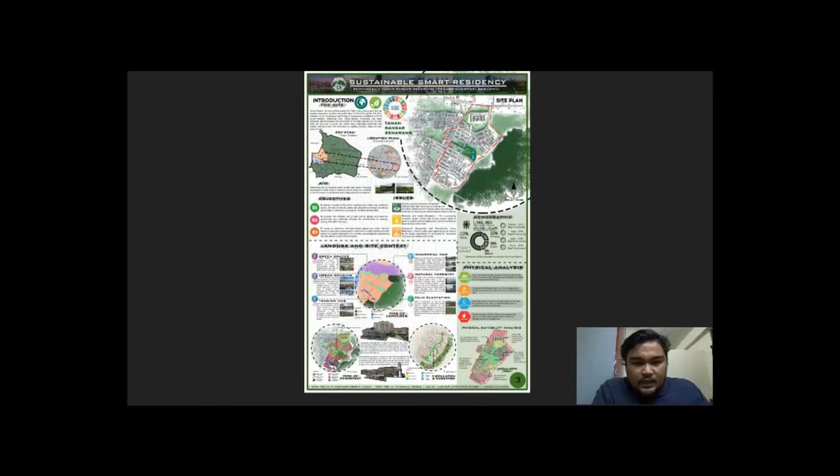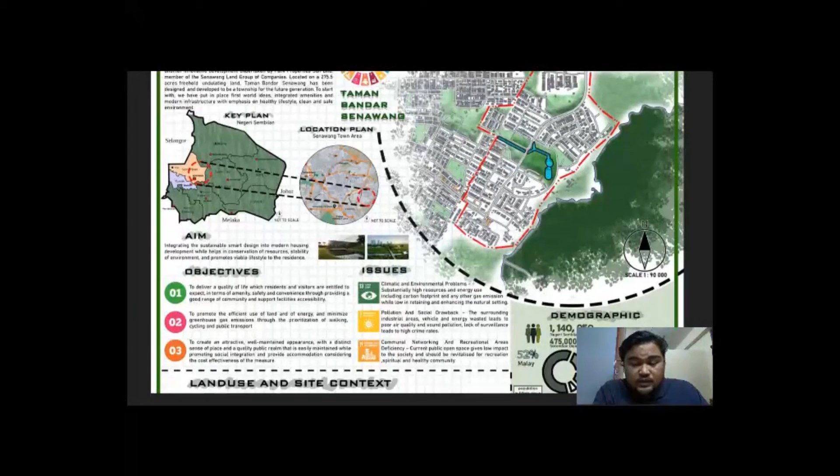I was under the supervision of Associate Professor LAr Dr. Mohd Ramzi Mohd Hussain and also Associate LAr Dr. Khalilah Zakariya, and my topic was Reinvigorate Taman Bandar Senawang through Eco-Smart Residency.

My site is located near Seremban, Negeri Sembilan, on 275.5 acres of freehold land that aims to be developed for future generations.

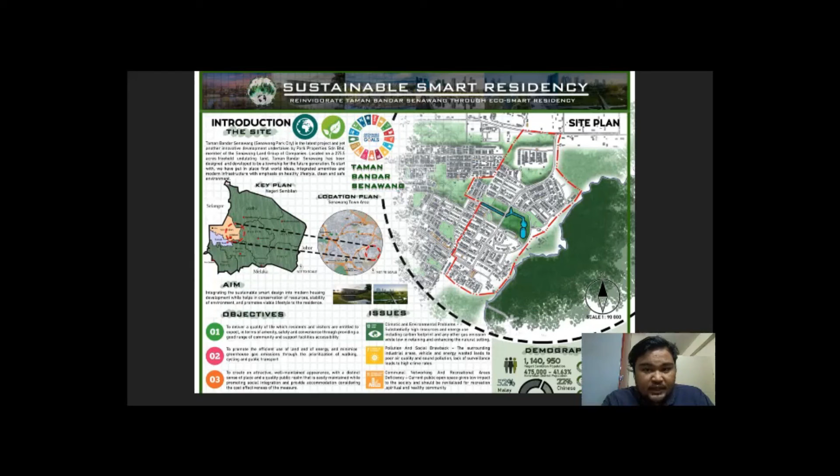The aim of the study is to integrate sustainable smart design into modern residential development. To support this aim, there are three objectives: first, to deliver a quality of life that residents and visitors are entitled to; second, to promote the efficient use of land and energy; and lastly, to create a residential area that is solid in communal networking, aesthetic aspect, and strong in social integration.

The main issues derived from the site are: first, climatic and environmental problems; pollution and social drawbacks; and also recreational and community area deficiencies.

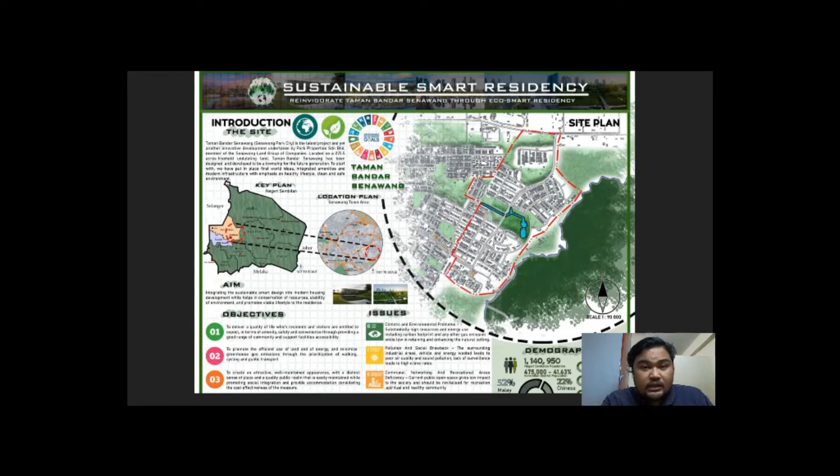After studying and analyzing the issues and potential of the site in the site inventory analysis, the synthesis is made. First, to overcome the safety issues, I introduced a sustainable smart security system that consists of smart fencing.

Second, for the climatic potential, the site can be used to gain solar power for electrical energy. Third, to address environmental issues through vegetation.

Proper and suitable vegetation was proposed, such as the Delonix Regia and Mimusops Elengi.

Fourth, to address almost all types of issues, I propose an Eco-Smart Park based on a community park that aims to fulfill all residential needs.

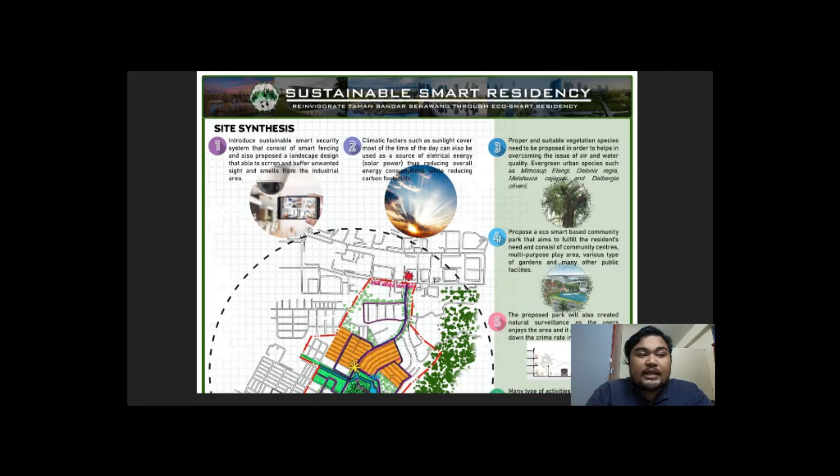The proposed park will also create natural surveillance, and many types of activities can also be done at the park.

Next, to overcome the circulation issues, I propose a good networking of pedestrian walkways and also bicycle lanes.

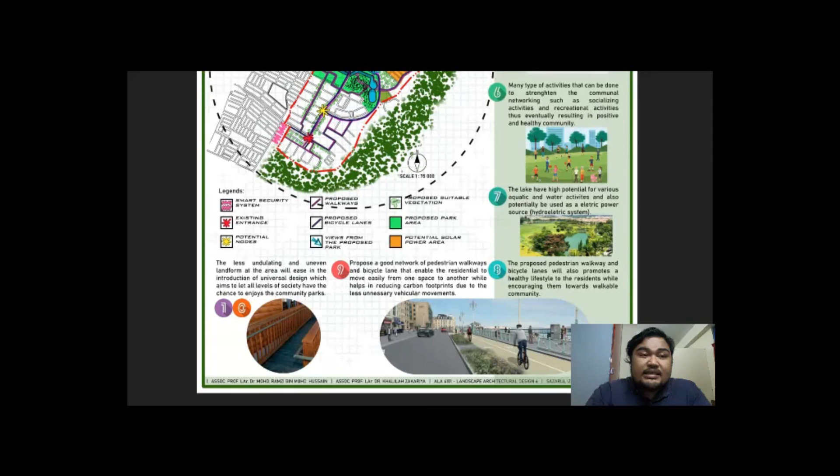Lastly, because of the topographical potential, the site has a less undulating landform, making it very easy to design for persons with disabilities (PWD) and also for elderly people.

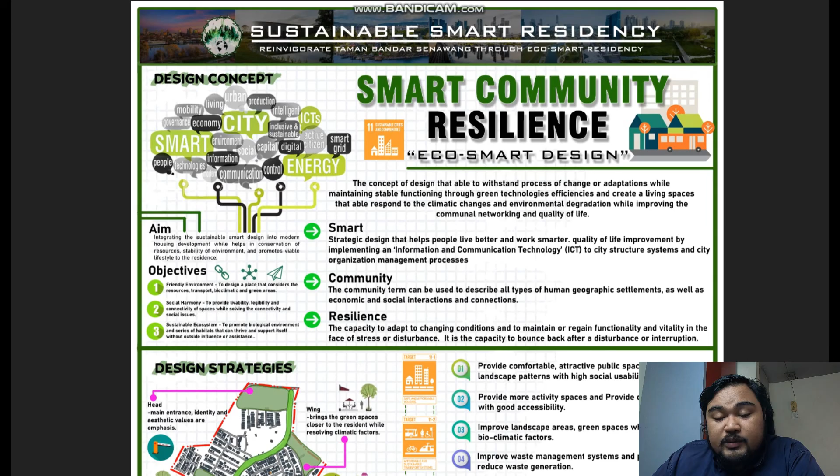My concept is smart community resilience, meaning a design that is able to withstand the process of change or adaptation while maintaining stable functioning through green technologies.

Next, for the design process, I'll proceed to the space programming, the bubble diagram. We aim to integrate the whole neighborhood area into a smart community park.

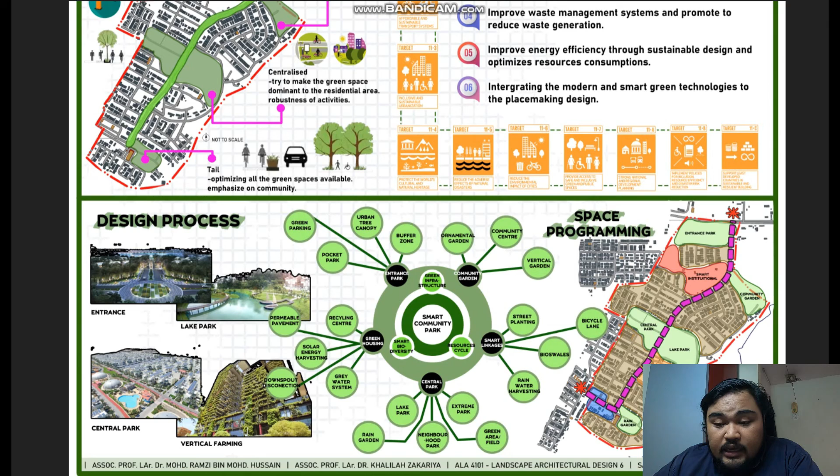the area has been the green area connected by the green corridor, or the spine, at the center of the residential area. Next, I would like to proceed to the functional diagram.

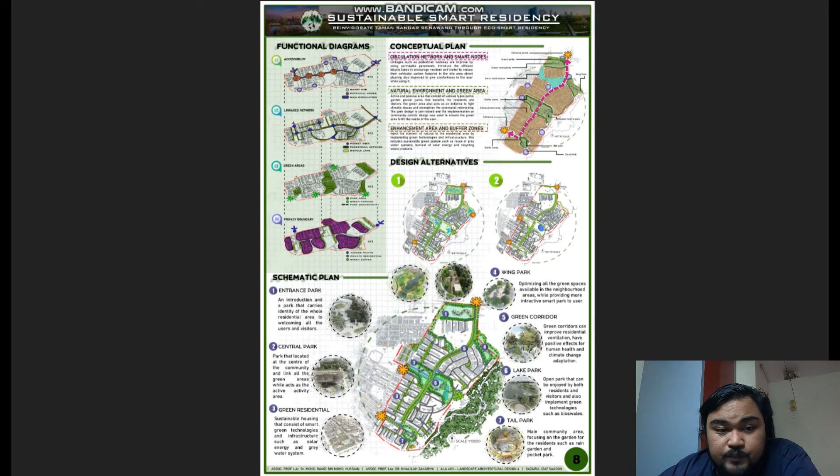For the functional diagram, I divided it into 4: the first one is accessibility, the second is linkages network, number 3 is green areas, and also privacy boundary.

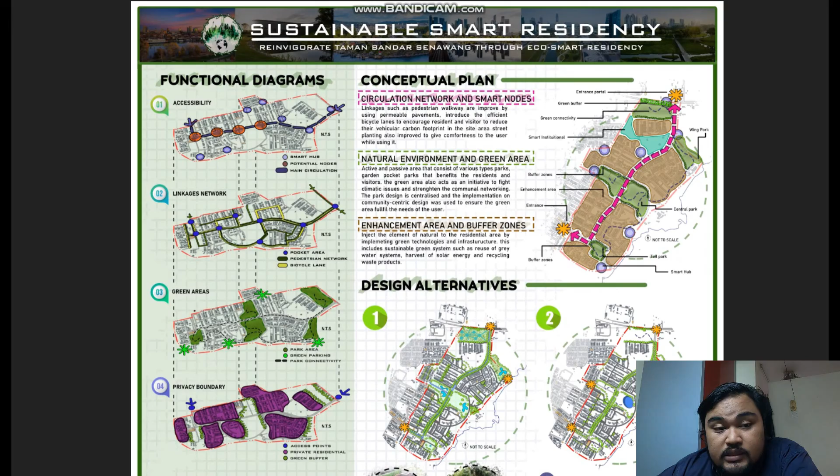The Taman Bandar is almost 70% private area, private residential, so I designed outside the privacy border.

For the schematic plan, we have 7 main areas: the entrance park, central park, green residential, wing park, green corridor, lake park, and tail park.

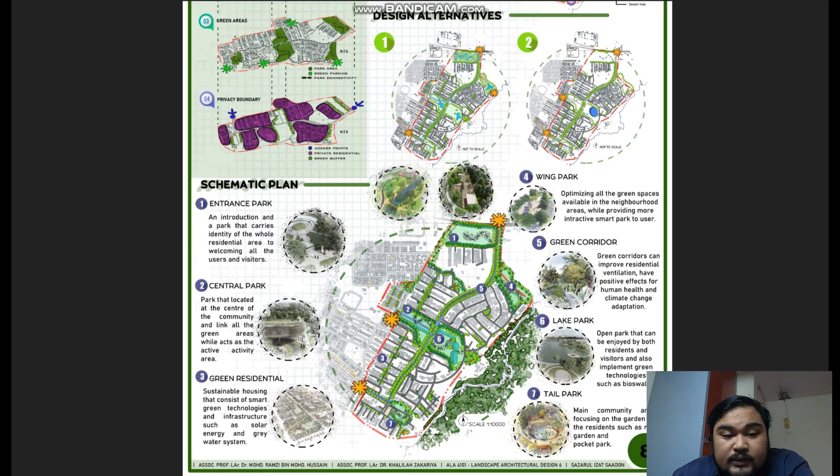The planting concept is divided into 3: the first is direction and accessibility control, the second is climatic order and approach, and lastly we have aesthetic values and sceneries.

The first one, direction and accessibility control: the planting was arranged to direct the user to the space that they want, and this also can avoid the feeling of being lost, and give the user or visitors a sense of welcoming.

Number 2, climatic order and approach: this is the selection of trees used that is dense with leaves, can filter out dust and any pollution from the air, and also contribute to better air quality and regulate surrounding temperature.

Lastly, we have aesthetic values and sceneries: the flowering plants and plants that have high visual impact were used to let the user enjoy while improving the overall sense and quality of the spaces.

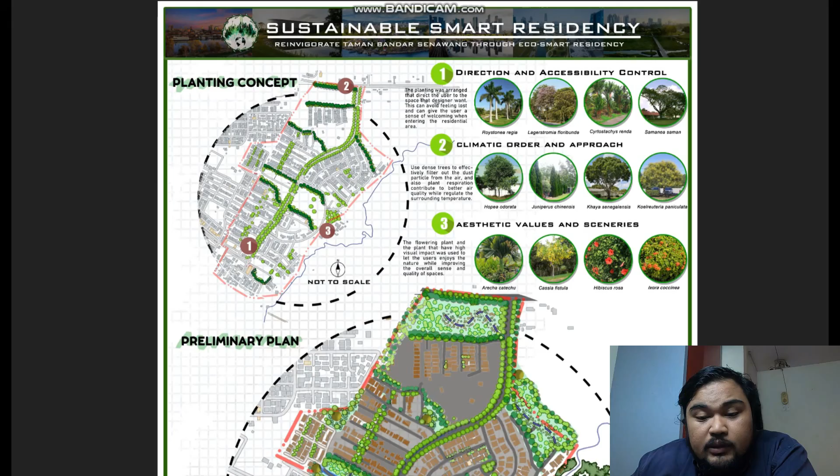For the preliminary plan, the scale used was 1 to 4000, focusing on the plant selection and plant arrangement, because the green corridor is very crucial as it connects all the green spaces to each other.

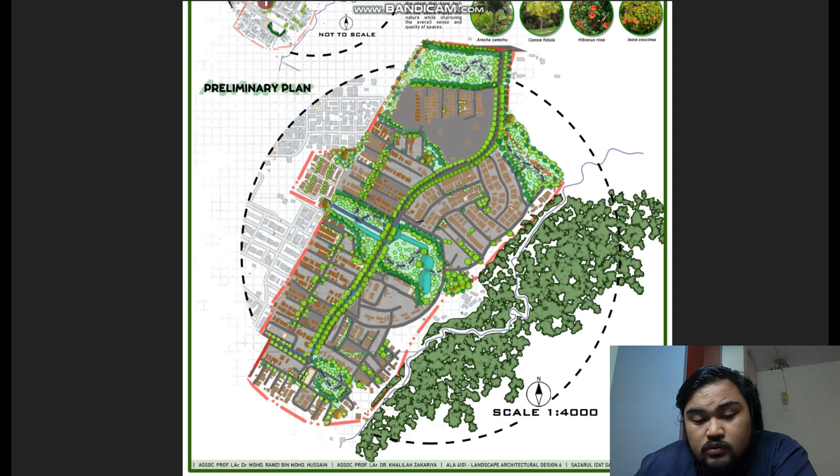So this is my master plan. My master plan focuses on designing the green area inside, such as the upper part of the park, so-called...

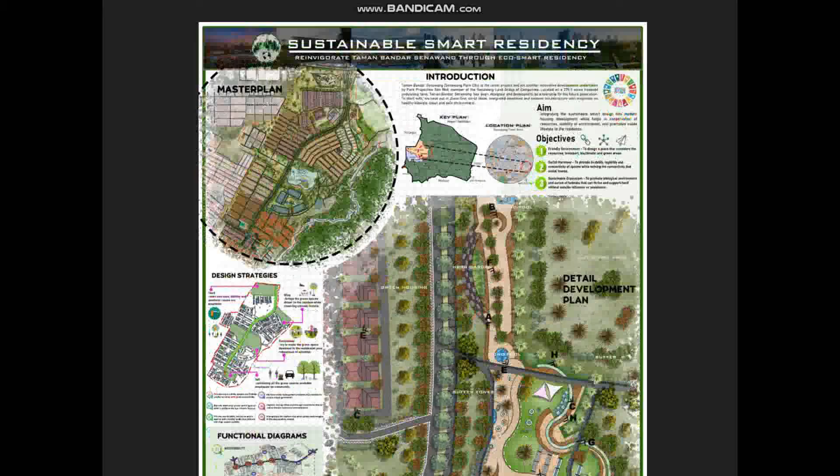the entrance park, the wing park, central park, and the tail park. We focus on enhancing the green area and also try to link one green area to each other.

So this is my DDP, Detailed Development Plan, derived from the master plan. My DDP is located at the center of my master plan. This park, initially called the wing park at my master plan, I then started to develop and detail more on the spaces on site.

At the detailed development plan, we have various spaces such as stream garden, fountain stage, buffer zone, green corridor, public area, housing area, water area, and pump plaza.

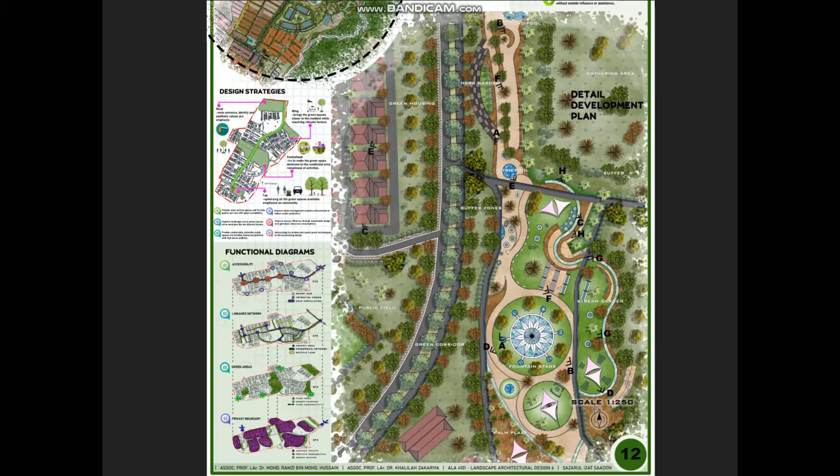Moving on to the sections, the first one is Section AA, a cut through the whole park where you can see my IDE, innovative design element, the shade, shelter, gazebo, water features, and plant arrangement.

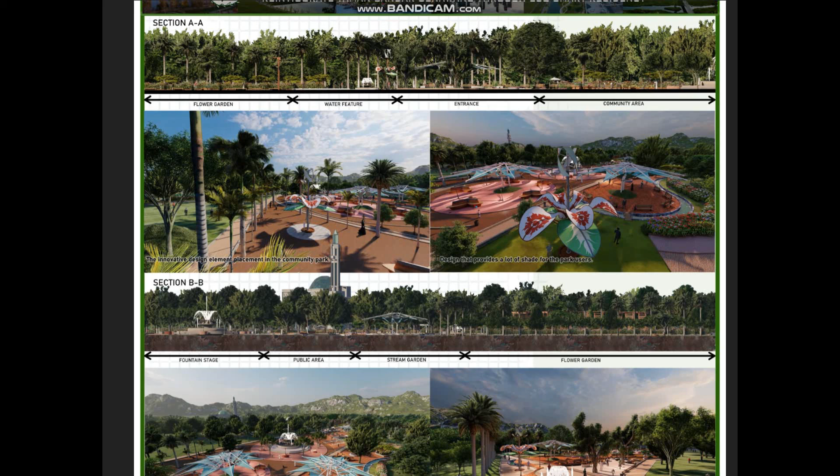These two are my perspectives, focusing on the IDE placement at the side, and you can also see some of the tree arrangement at the side.

Next we have Section BB, a long section cutting through the longer part of the park, facing the housing side or the mosque side. It includes the fountain stage, public area, stream garden, and flower garden.

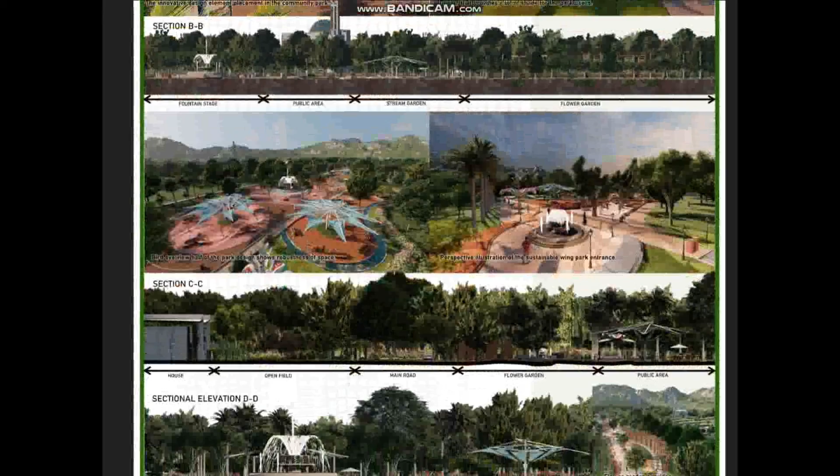Moving on to the perspective, this one is a bird's eye view of the bottom part of the park.

Next is the perspective of the entrance area. The sections here cut through the housing area, open field, main road, flower garden, up to the public park or public area. Next we have Section Elevation DD.

This is the cut at the bottom part of the park, which contains the fountain stage, walkways, and stream garden.

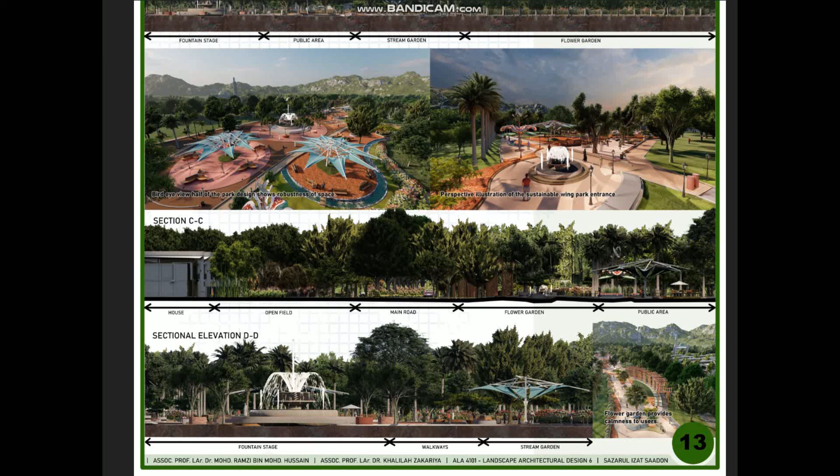Lastly, this perspective shows the linear flower garden and the plant arrangement.

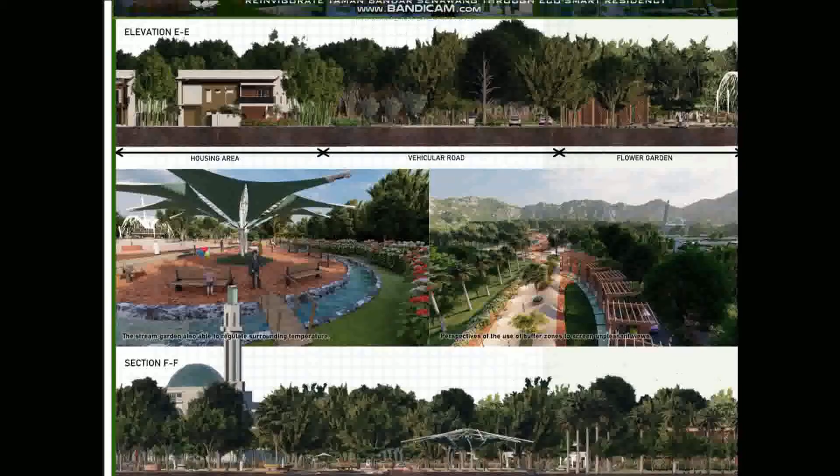Moving on to Elevation EE, which also cuts from the housing area up to the public park or sustainable park. The first part shows the housing area with a bigger space, the vehicular road, and the flower garden.

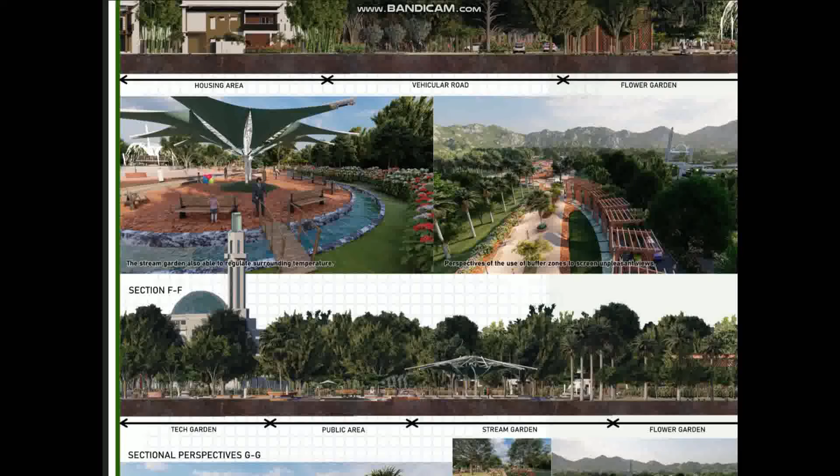These two perspectives are at the stream garden, where you have the water bodies, so-called man-made water body structures.

Next is the perspective of the flower garden. Section FF shows the section cut of the park at the bottom part that faces the mosque and housing area. For my IDE, innovative design element, I name it Eye of Umbra because the design catches the eye, and Umbra means shade, giving shade from sunlight to the user.

Umbra means shade, giving shade from sunlight to the user. So this is the perspective of my IDE.

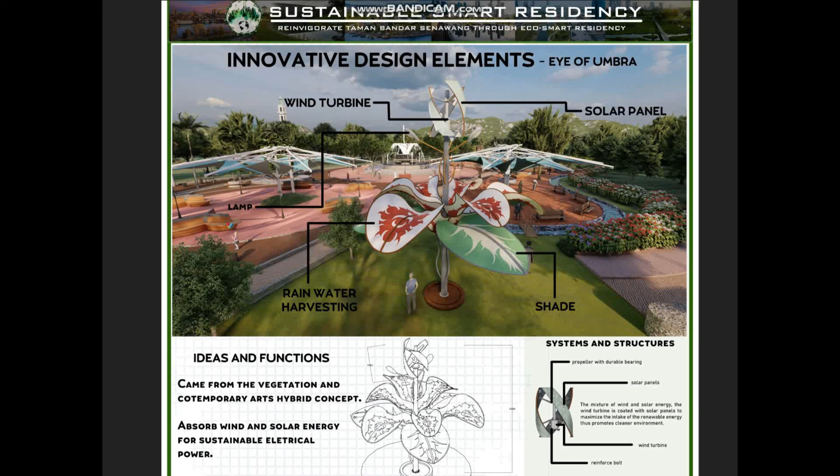As you can see, it's made up of several technologies. The top part is a solar panel, and it also acts as a wind turbine to collect wind energy to power up this lamp, meaning the lamp runs on sustainable energy. It also acts as rainwater harvesting, with the leaf-like structure acting as shade.

For the ideas and function, my IDE came from the concept of vegetation and contemporary arts combined. It is also able to absorb wind and solar energy and convert them into sustainable electrical power.

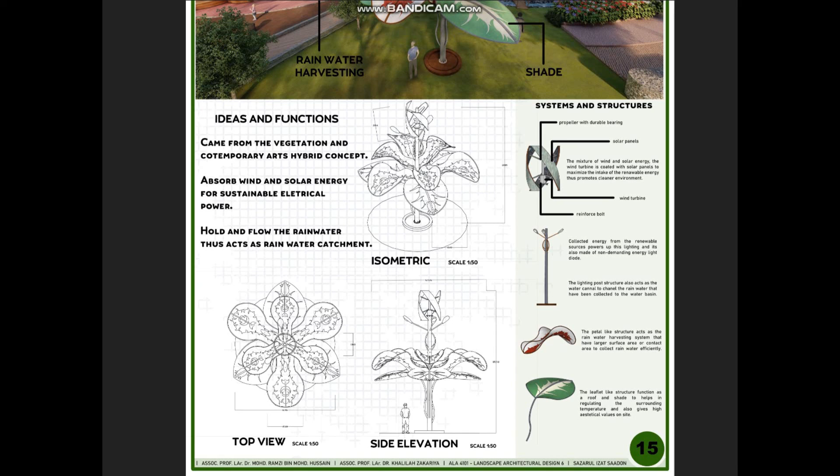Lastly, I would like to explain a bit on the system and structure. The structure is made of a few things: the propeller with durable bearings, solar panel, wind turbine, and the reinforce bolt.

The upper part of the idea uses a mixture of wind and solar energy, converting them into electrical and sustainable energy, thus promoting a cleaner environment.

The second part is the lamppost or lighting pole, which uses the collected energy from the upper part to power up the lighting.

The lamp is also made of the new non-demanding energy light diode. The lighting post also acts as a water canal to channel the collected rainwater, pumped through the water basin.

Second to last, we have the petal like structure that acts as the rainwater harvesting system, with a larger surface area and contact area to collect rainwater efficiently.

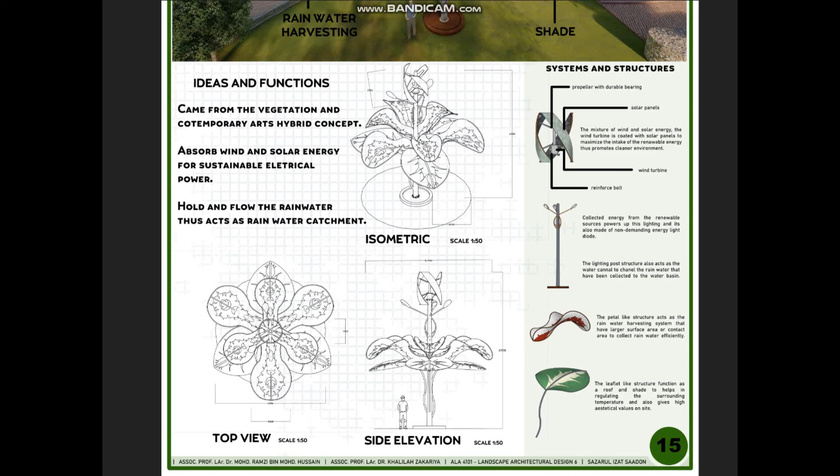Finally, we have the leaflet like structure that functions as a roof and shade to help regulate surrounding temperature and give high aesthetical value.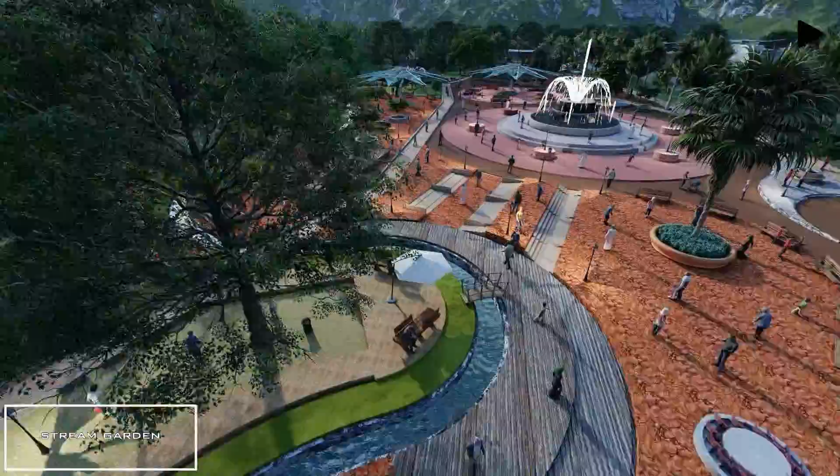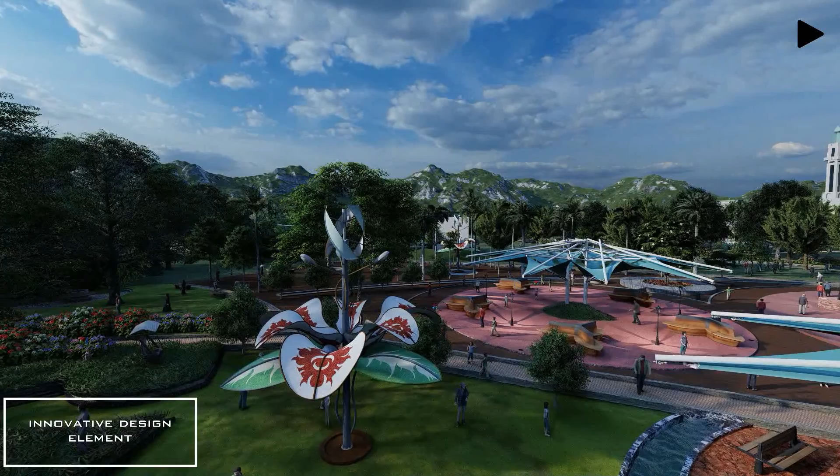Next, let's move on to our softscape plan and softscape schedule. First we have the softscape schedule, the softscape plan itself, the softscape palette, and the planting concept.

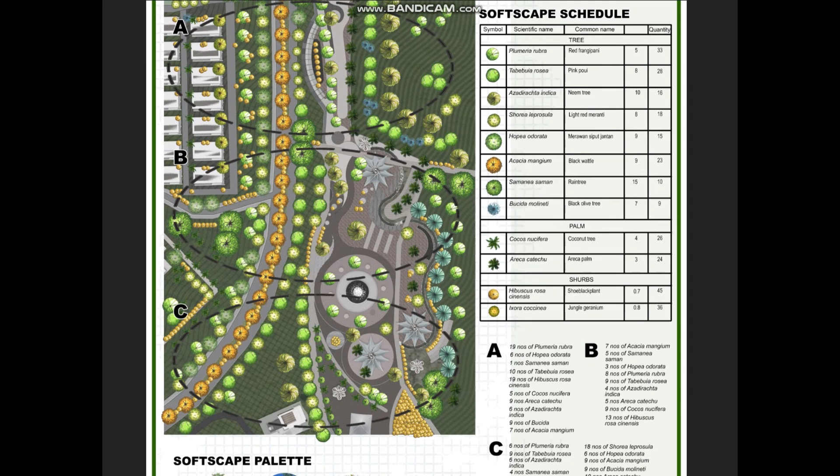In the softscape plan, we divided the area into three different zones: A, B, and C.

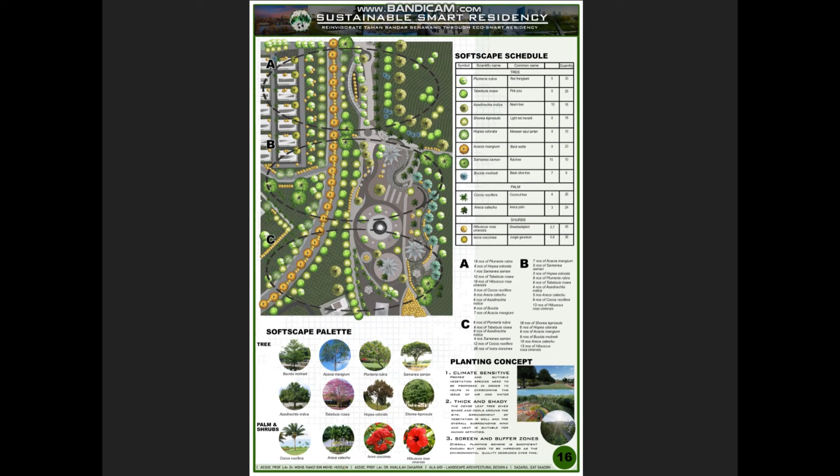In the softscape schedule, we listed all the species used on site, along with their symbols and common names. Examples of softscape planting used include Plumeria, Tabebuia, Hopea odorata, Acacia, and Samanea saman. There are also palms and shrubs used inside.

Then we have the softscape palette, and finally the planting concept, which is divided into three: the first focusing on climate sensitive planting, the second on thick and shady planting, and finally screen and buffer zone planting.

Finally, let's move on to the hardscape plan. All the vegetation has been removed in the hardscape plan so that the hardscape or landscape furniture is easier to see. Next we have the hardscape schedule.

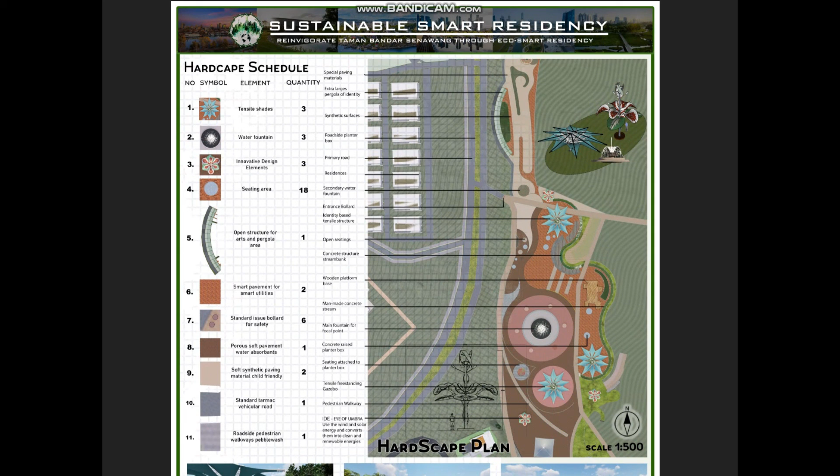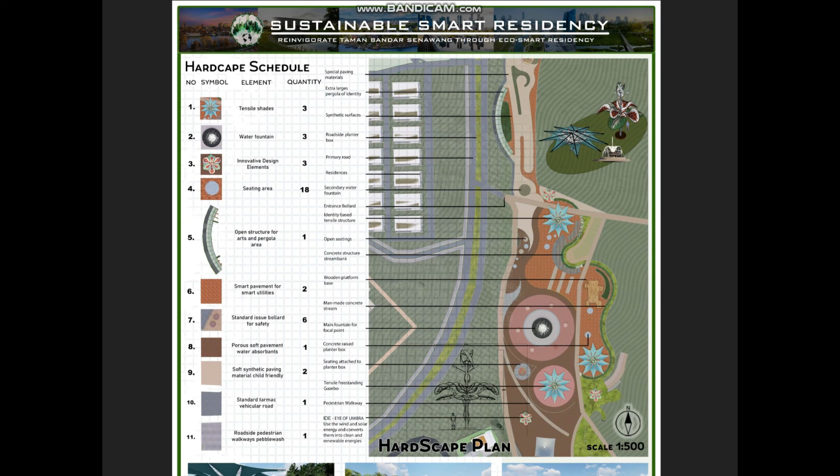The hardscape schedule includes tensile shade, water fountain, my IDE, seating area, open structure, and construction materials. This shows some perspectives of the hardscape inside, such as the stream garden, bridges, and wooden staging at the public area.

Then we have the shade and tensile structure, the IDE, and finally the view at the flower garden.